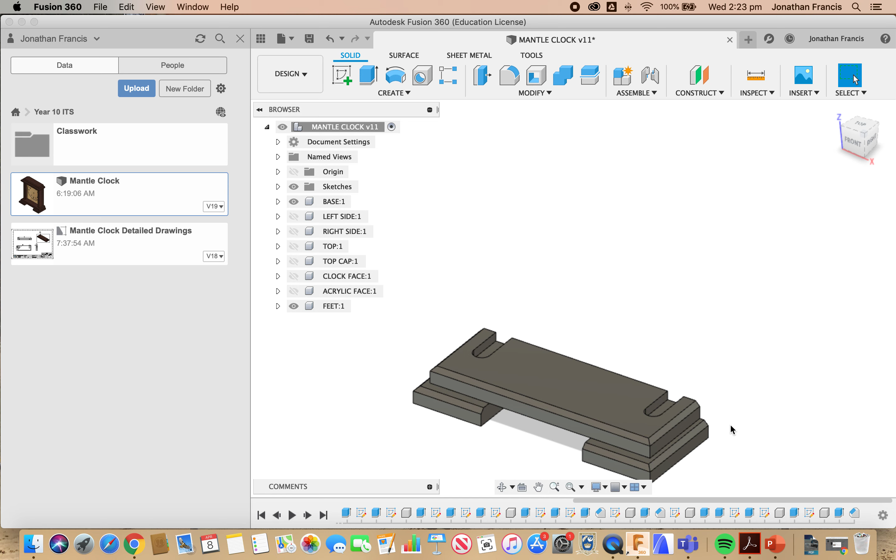So to start off with, I'm going to turn off the acrylic face, the clock face, the top cap, the top, the right and left sides. I just want the base and the feet. And I'm going to rotate around. So we have our base, and I'm going to start a new sketch on one of these feet. Now it doesn't really matter which one, because we're going to do the same for both.

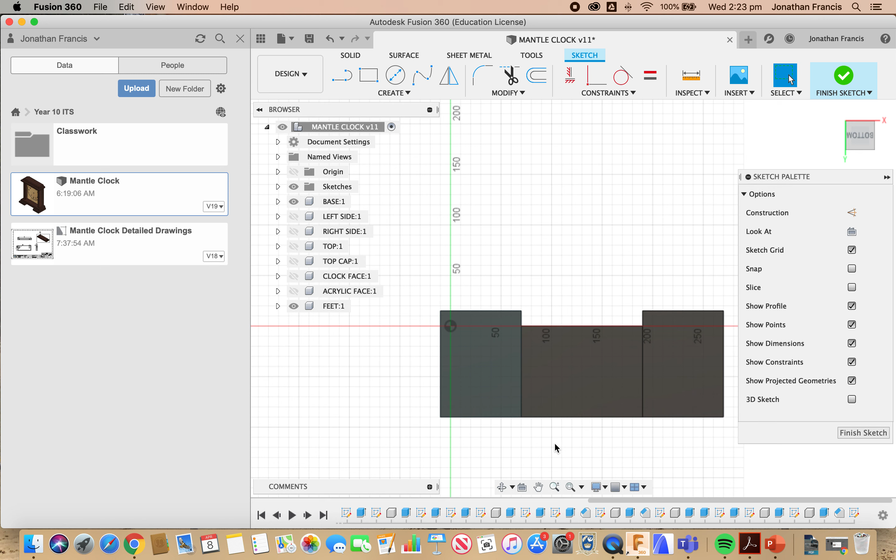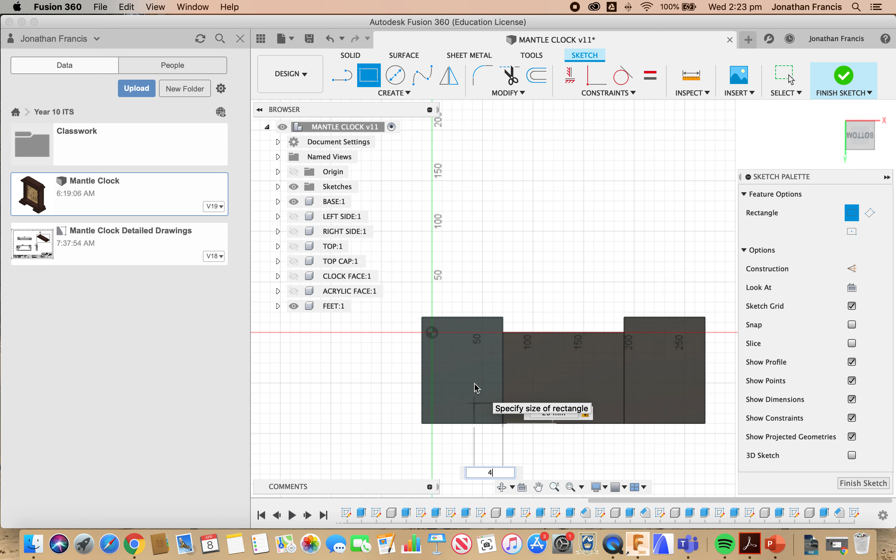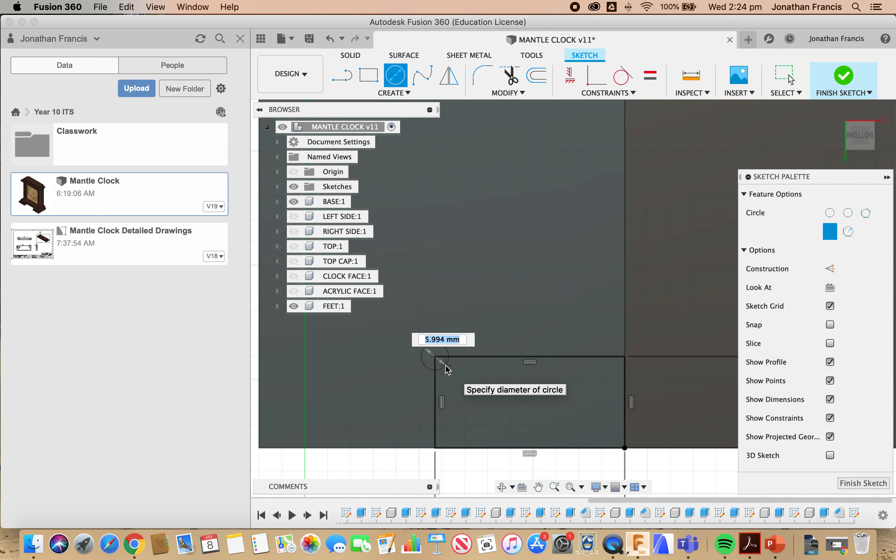We're going to start off with a rectangle, and that rectangle is going to be from the inside back corner, and we're going to drag that out. We want that to go forwards 20 and in 41.5, and we select enter. We're then going to put a circle in here. This is for a hole. So we're going to zoom right in, C for circle. We're going to select that center point on the edge of our rectangle and give our dimension of 3.

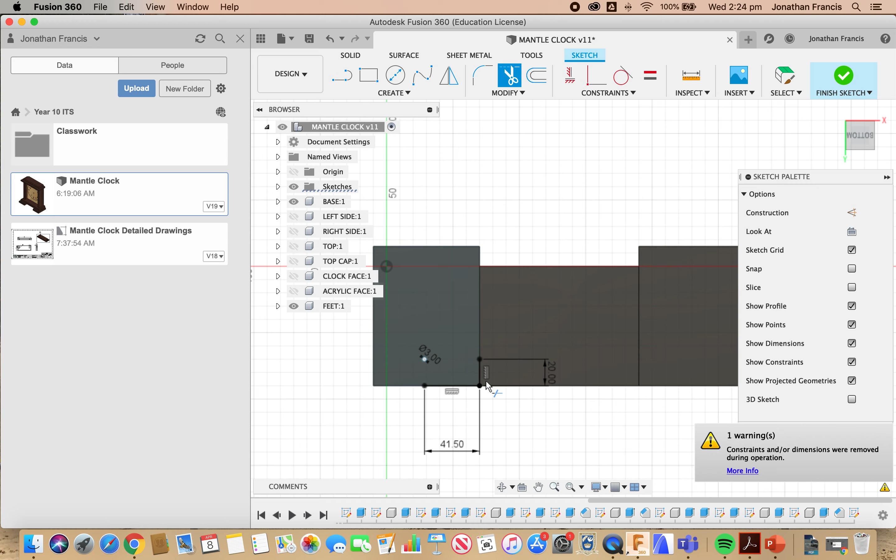Now we do want to trim this to get rid of the excess lines. So I'm going to select trim. I'm going to trim off that excess. That hole is the one we're after. Now the reason that we've left on both these pieces, we can trim off those as well, is because I actually want to cut this hole right through both those components. So I'm going to finish the sketch there.

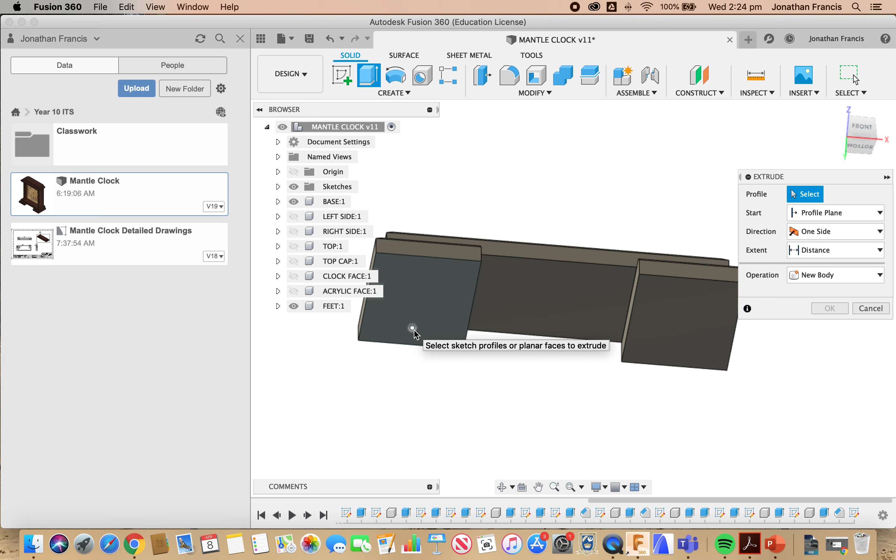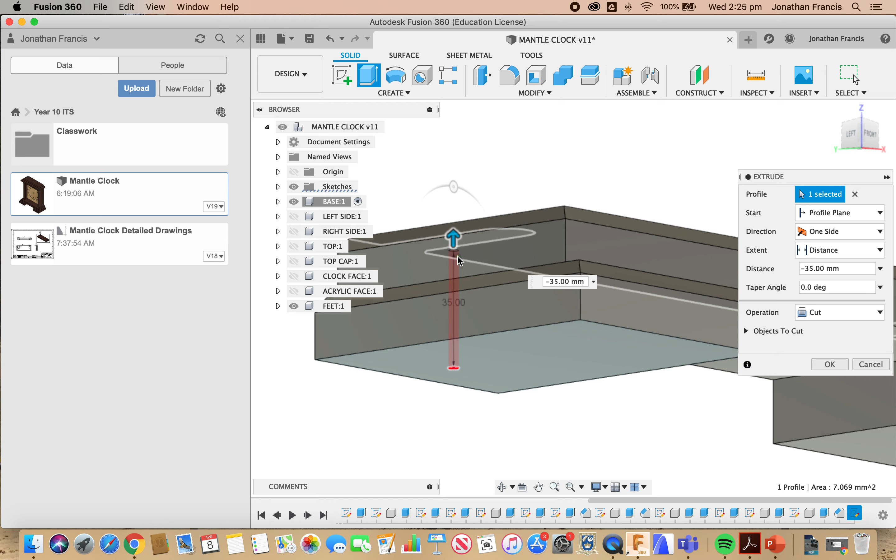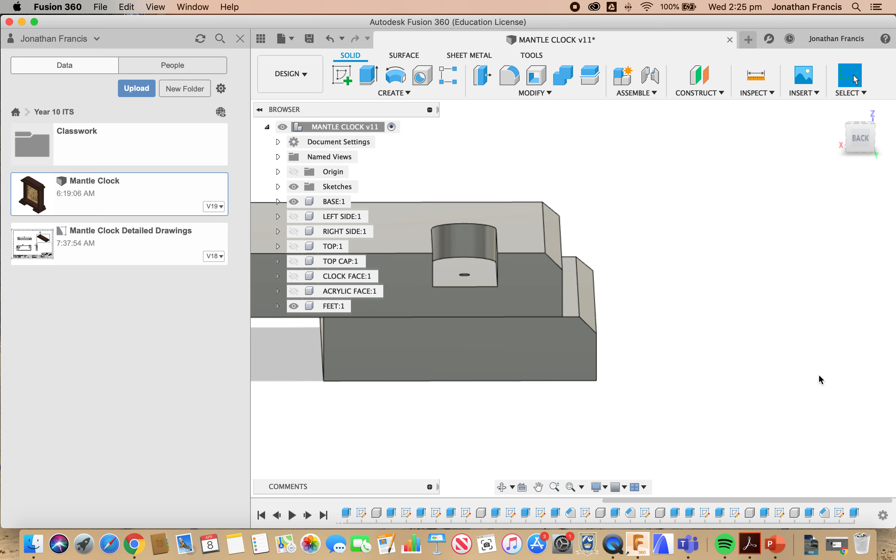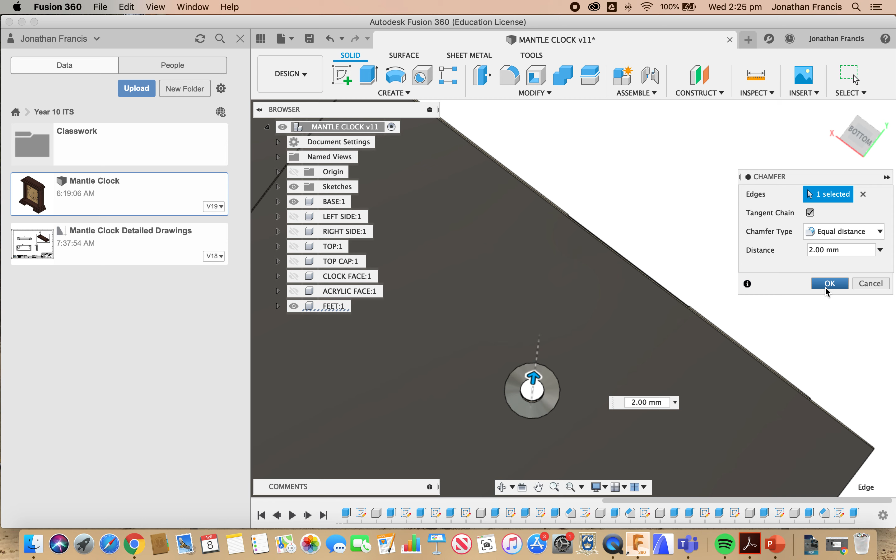Now we're going to duplicate this on the other side, but before we do, I'm going to zoom in nice and close here. I want to select the edge. And we go to modify, and I'm going to put a chamfer on that edge too, of 2 millimeters, and select OK. This is going to allow us to countersink the head of our screw as our joining method for joining our base and feet to the rest of our clock. So I'm going to zoom out there.

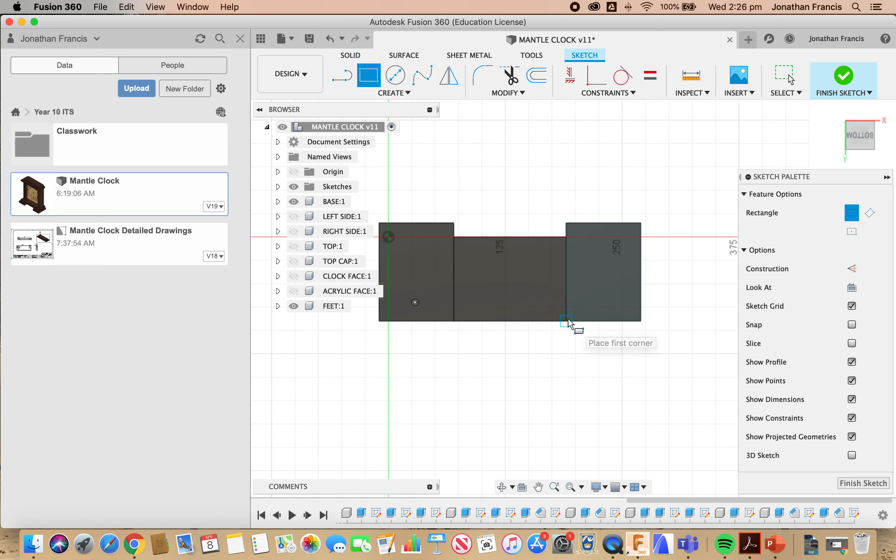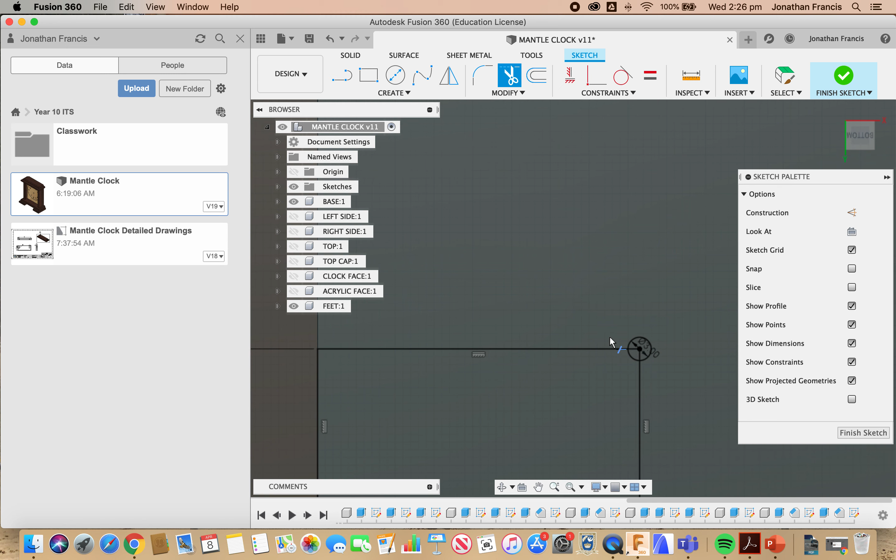We're going to select the other foot, and again drawing from the inside rectangle. I'm going to drag that out. We're going to go forwards 20 and in 41.5. Enter. We'll do this much quicker now, since we've already done one. C for circle. 3. You want to trim the excess, particularly on the inside. So let's trim that out. Let's get rid of those as well.

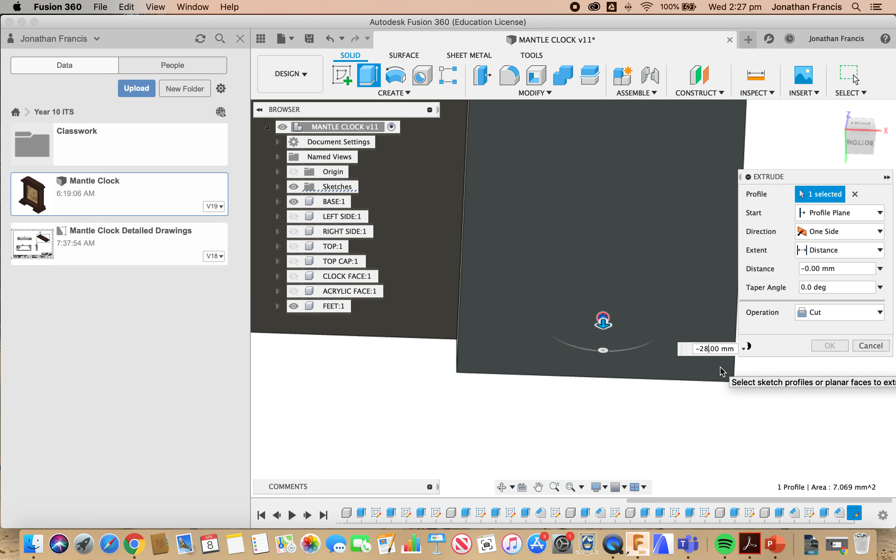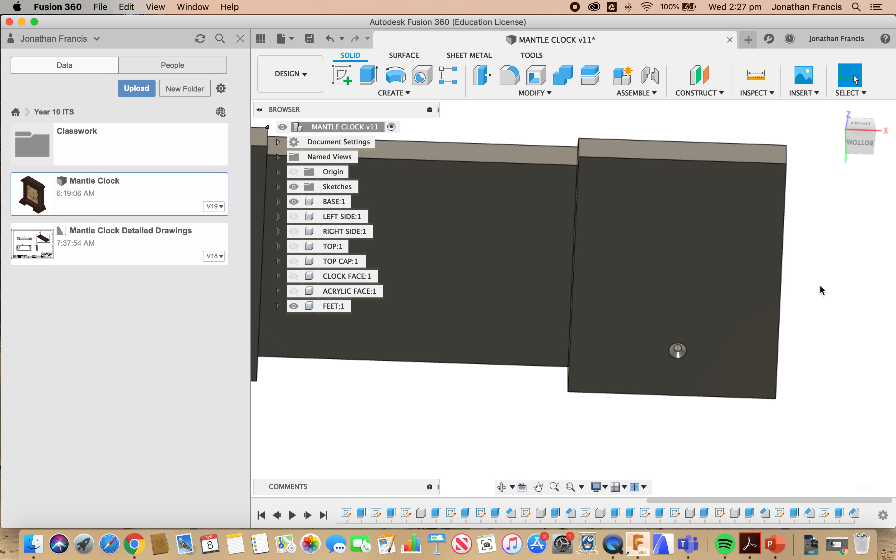We then want to extrude. Select the hole. We're going back through the profile plane. 28. We want to cut. Let's just make sure that we're cutting both objects. Yes. And we select OK. Lastly, we're going to grab that edge, modify, chamfer, 2 millimeters, and we're pressing OK. Save that, because that is our construction now finished, and we can turn on the rest of our components.

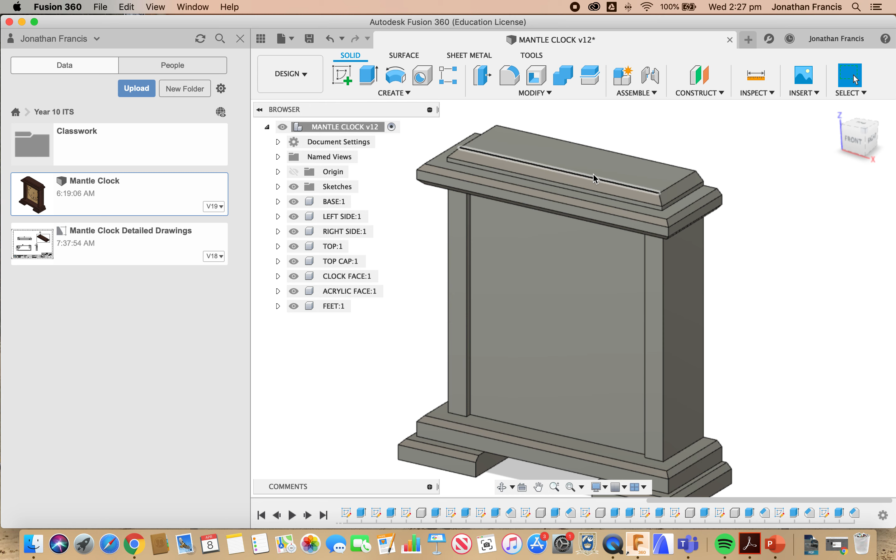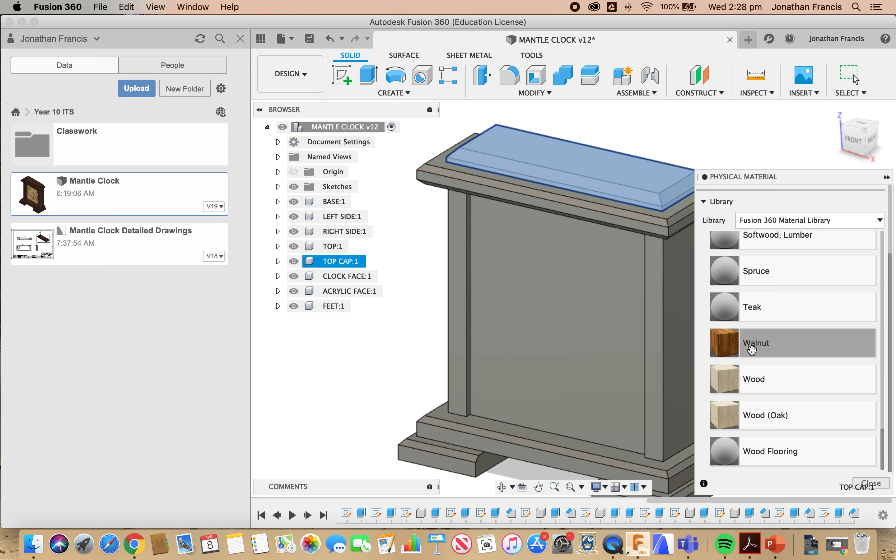And you can see our components here, they're not looking quite like they should. So we are going to select a component, a whole component, right click, and we're going to go down to physical material. This is going to give us a number of options. I'm going to scroll down until we get to wood. I'm going to select it. Then I'm going to continue to scroll until I can find something that's going to resemble our clock. Now I can select walnut, drag that on. It's very dark.

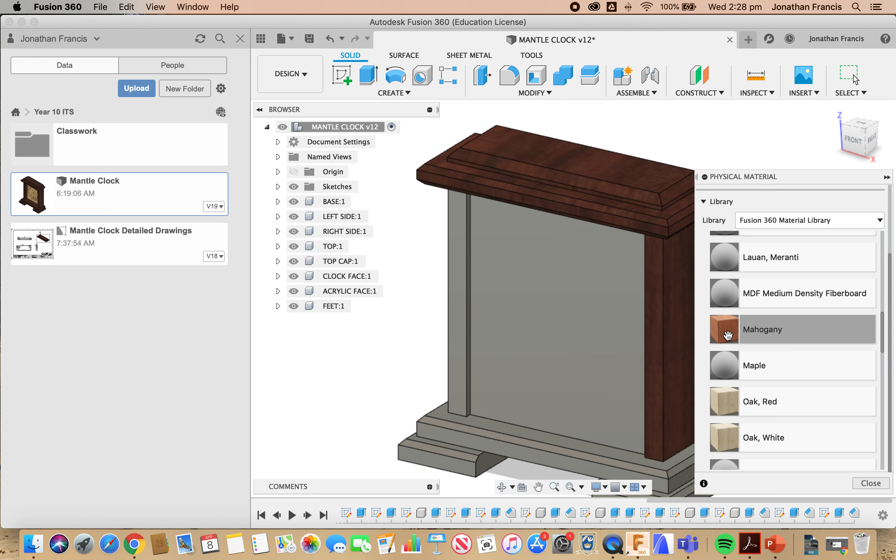If I come back up here, mahogany might look a little bit better. A bit more realistic. We are not using mahogany, but it is looking a little bit more realistic. Now I can drag this onto any and all of the components that we're making out of our Australian hardwood, which I'll do. So the base and the feet. And we're looking pretty good, so let's hit close.

We now want to do the acrylic face. So again, we're going to double click on the item, right click physical material, and this time we're going to go to plastic, scroll down till we get to clear acrylic, grab that and put it on, and instantly you can see how we can see through that item. Okay, and close. Last but not least, we need to do the face of our clock.

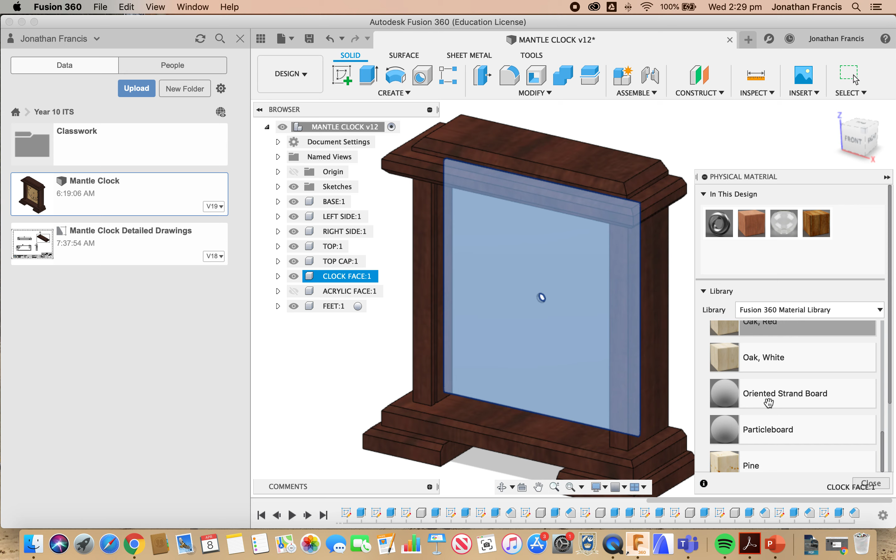Now in order to do the face from this view, we actually have to turn the acrylic surface off. So we can select the face, double click on it, physical material. This time we're going to hide plastic, so I'll select that one again. We want to go with wood, and I'm going to go down to, hopefully we've got it in here, plywood finish. And if we drag that on, you can see that it has really not changed. That's okay. We're going to render that in our rendering shortly. So save those, and our clock is now ready for rendering.